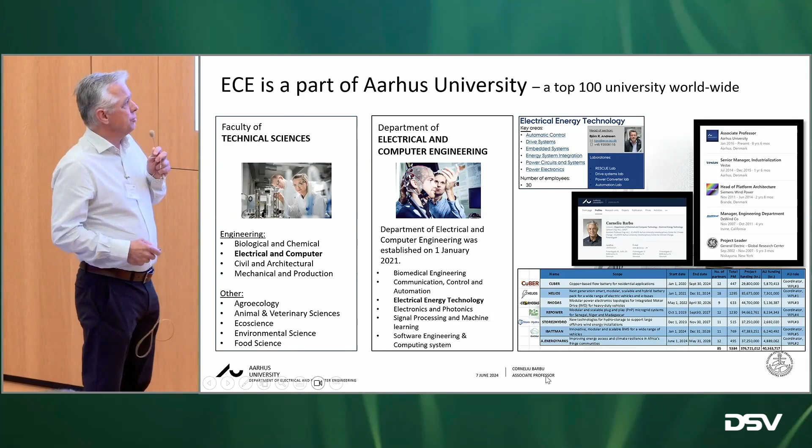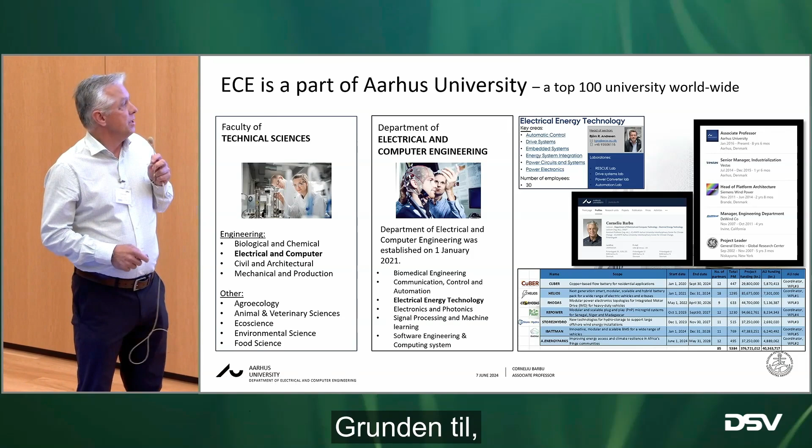But just as a short introduction, I'm from Aarhus University. We're in the technical science faculty in the electrical and computer engineering department. Specifically, I'm in this section called electrical energy technology. And I also put here a number of projects in which we are involved now. There has been quite a bit of European funding coming towards us recently. The reason why I put this here is that we are involved in a few projects which are about

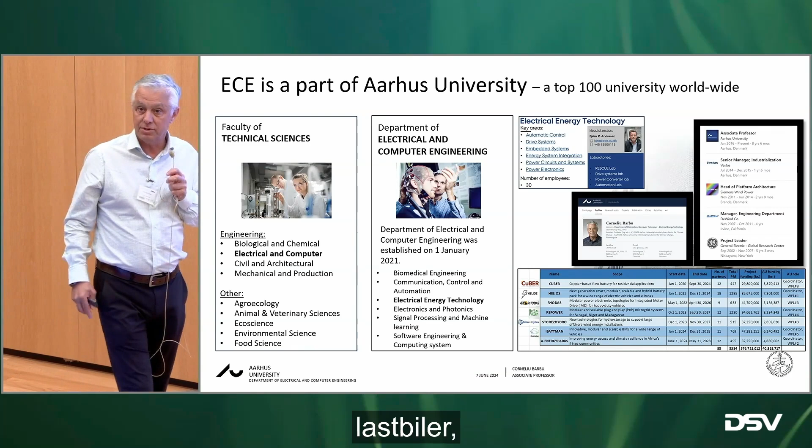electric transportation. In Helios, as an example, we're building a battery pack which is hybrid, a combination between high energy and high power type of cells. In RHODAS, we're looking into electric trucks, mostly on the power electronic side. And iBATTMAN is more on the BMS, cloud, edge computing, these kind of new buzzwords. Point of this being that we're also involved in developing some of these technologies, not only in using them. And there is quite a bit of collaboration at the European level in developing the new technologies.

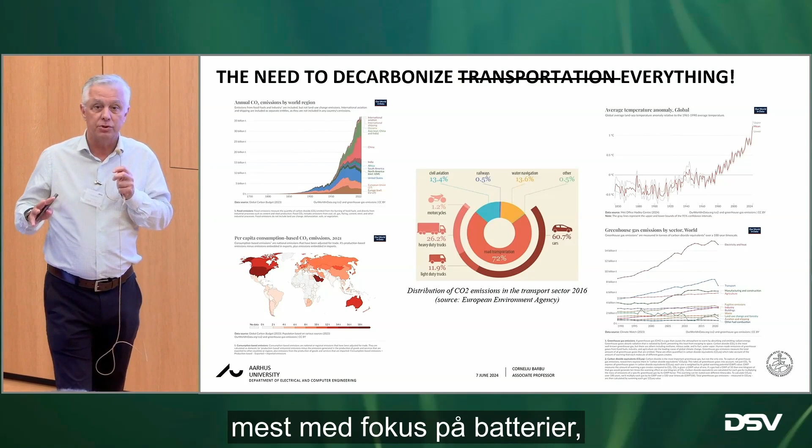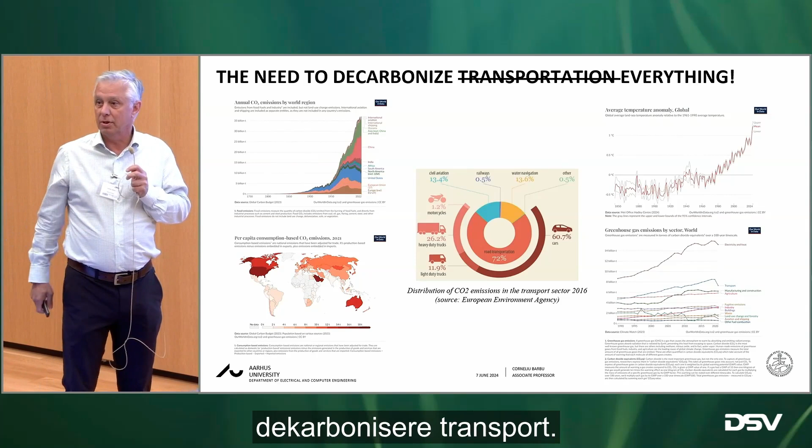So before I get into some of the specific technologies, mostly focused on batteries, charging, carbon footprint, things like that, I want to make a point about why we need to decarbonize transportation. And of course, I'm kind of preaching to the choir here. I'm sure everybody knows about that. But I would like to make a point in terms of the urgency of this imperative, right? So when I look at the carbon footprint around this time, which is about 35 billion

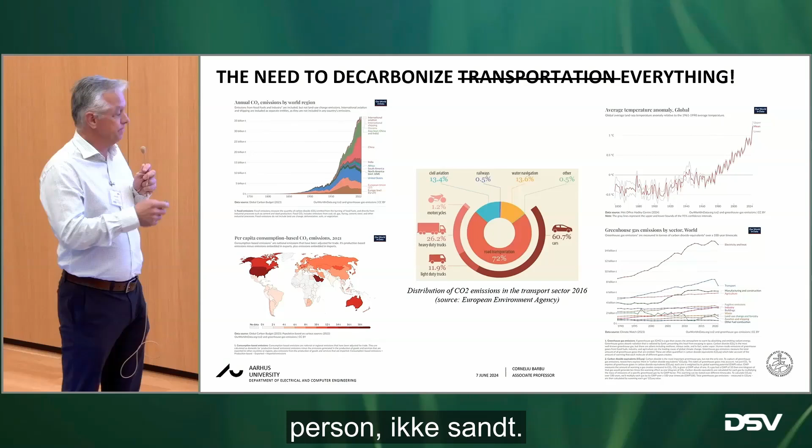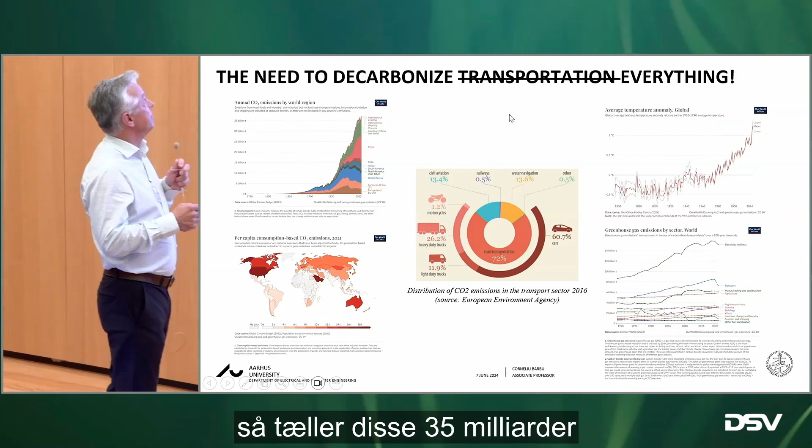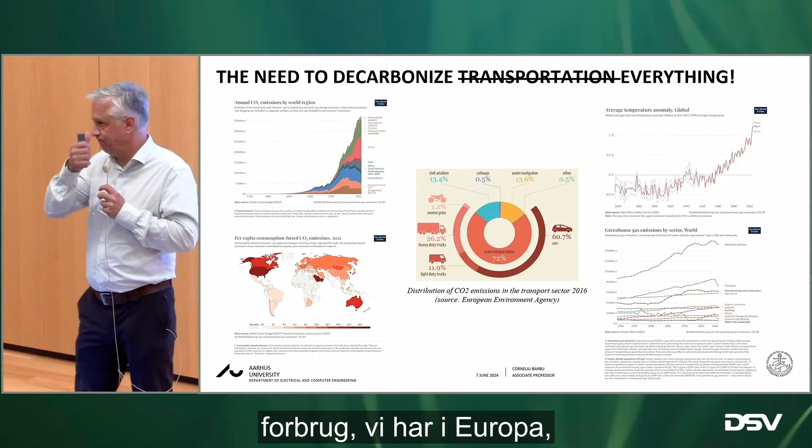tons, not including land use, and we're about 8 billion people, then on average we're about 5 tons per person, right? When I look at the carbon footprint on average in Europe, which is roughly about 10 tons, then essentially these 35 billion tons account for about 3.5 billion people at the consumption that we have in Europe now. Of course, not everybody consumes at the same level, and not to mention that these guys are way off the map. But on average, right?

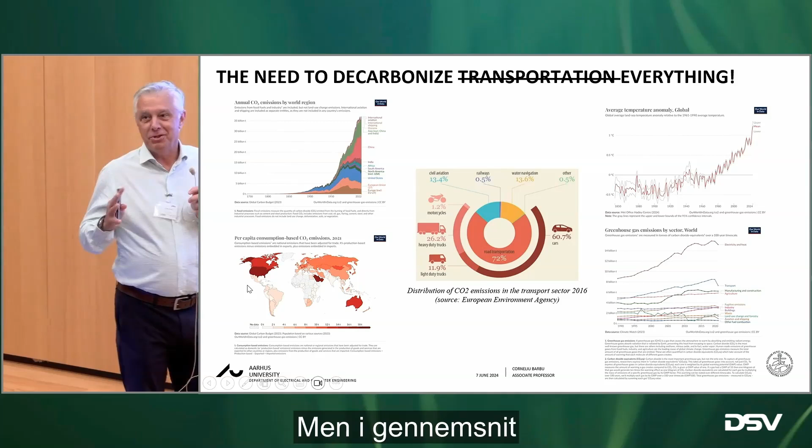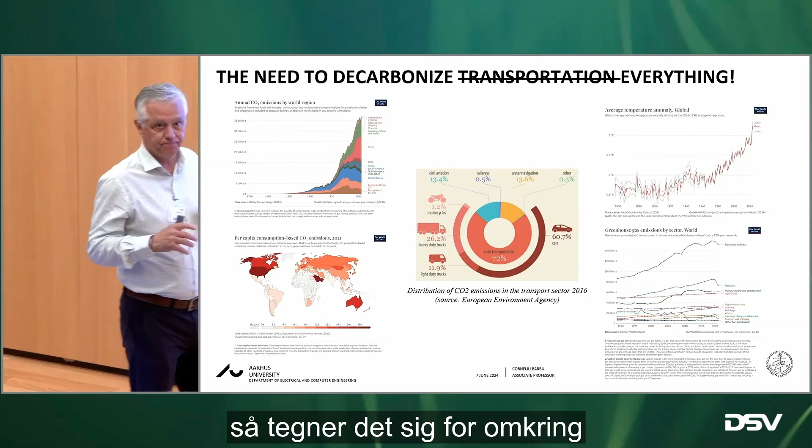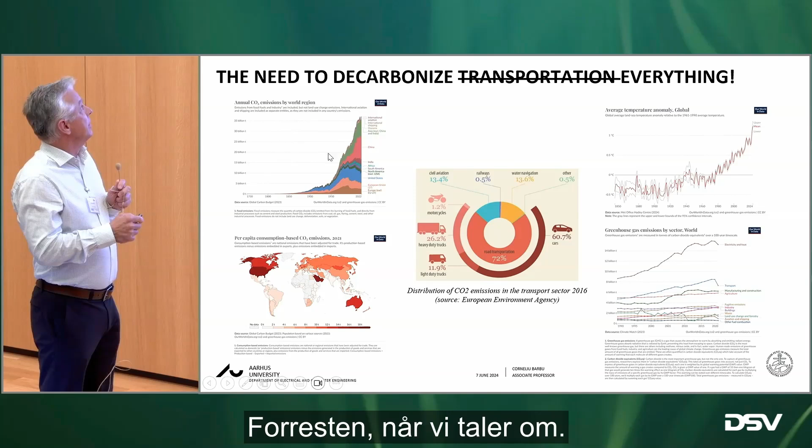You would say that at 10 tons per person, 35 billion tons overall carbon footprint per year accounts for about 3.5 billion people's consumption at the European level. By the way, when we talk about 35 billion tons, that is the annual production. So that comes on top of last year and the year before.

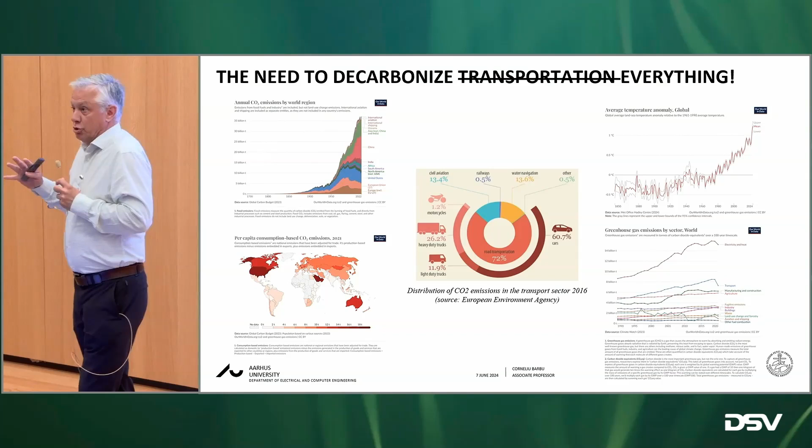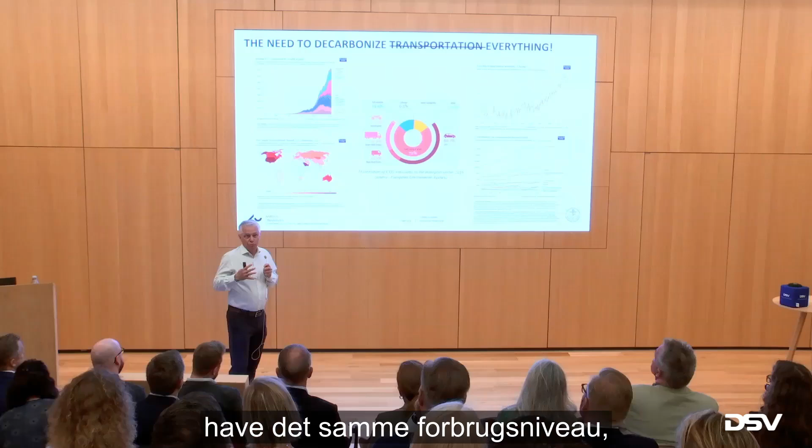Now we're about 8 billion people, and we grew at 1 billion every 10 years in the last 20 years. So roughly, let's say that we're going to be about 10 billion by 2050. When we look at the rate of growth between developing and developed countries, the developing countries are developing much faster. So we could probably assume that we're going to be 10 billion people, and a large percentage of them are going to have the same consumption level as we had, let's say, 25 years ago.

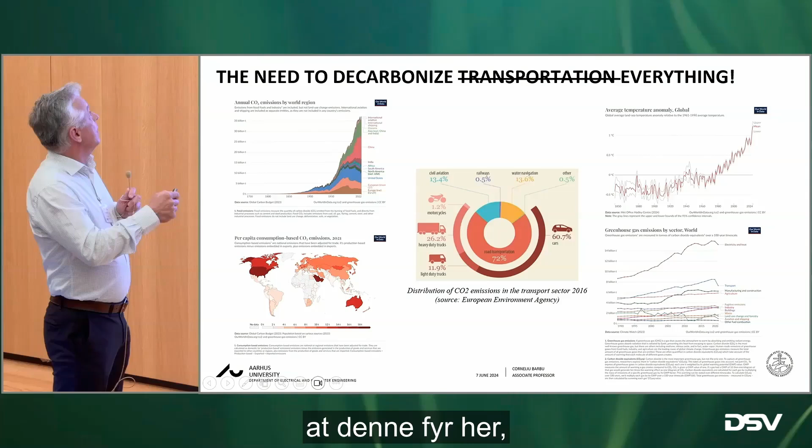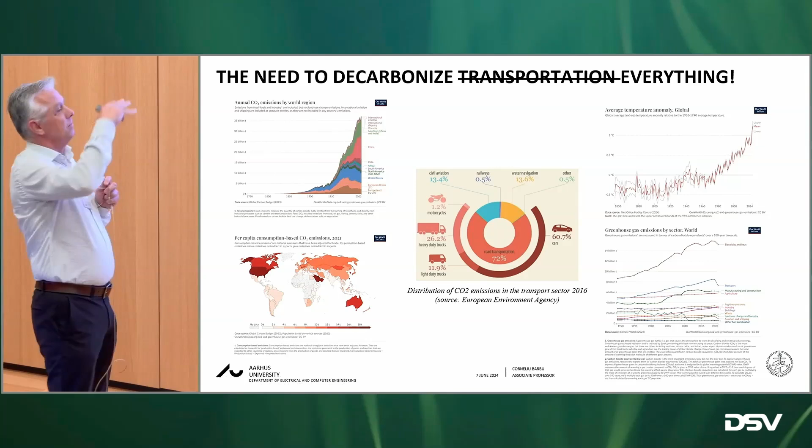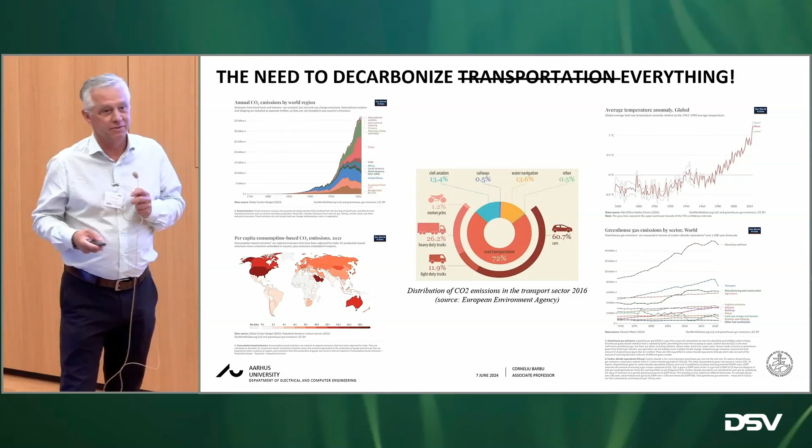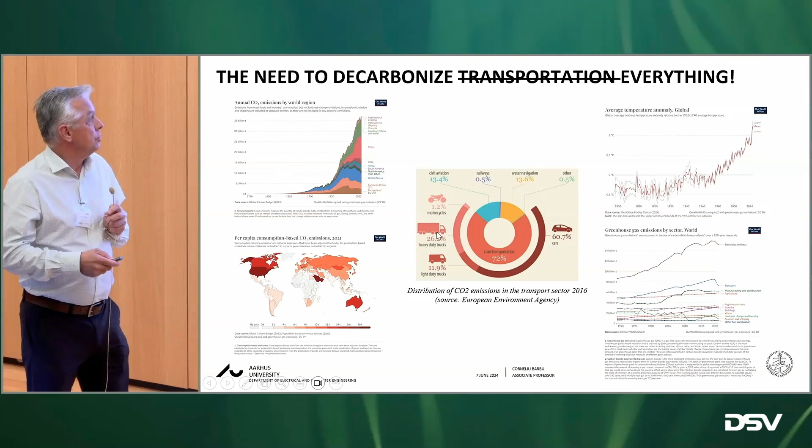Point of this being that this guy here, probably in 2050, is going to be closer to the ceiling, right? Which also means that this guy here is also going to be, so we are kind of running out of time. And of course, we have to talk about cost and things like that, but fundamentally, we have a big problem, and we're here because of this. So as I said in the title there, we just have to decarbonize everything, including transportation as well, right?

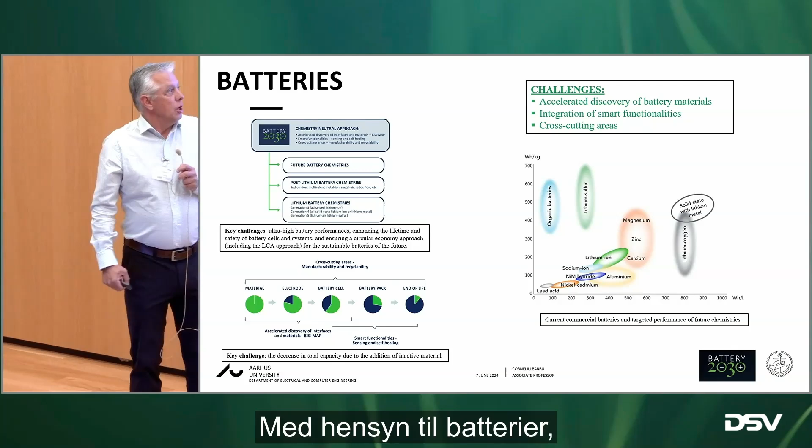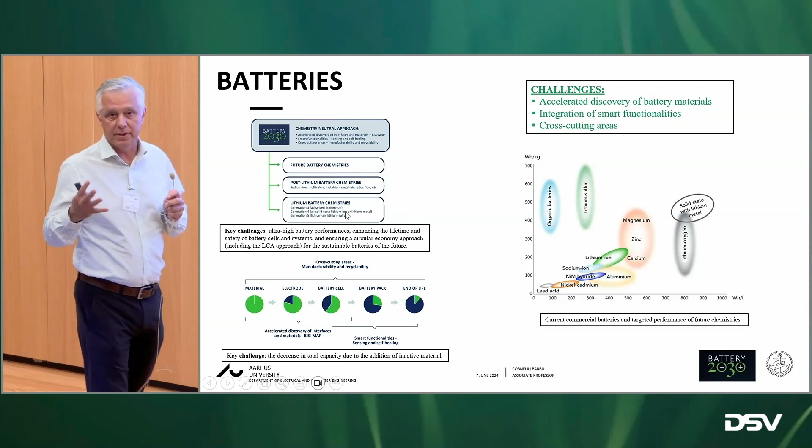So what are some of the challenges? I'm going to talk about batteries, charging technology, environmental footprint, maybe some others, right? In terms of batteries, chemistry is basically an evolving field. We have what we call Gen 3 battery technology at this point, lithium batteries, but these things are evolving, right? So we're talking about Gen 4, solid state, these kind of things. We're also talking about Gen 5 technologies.

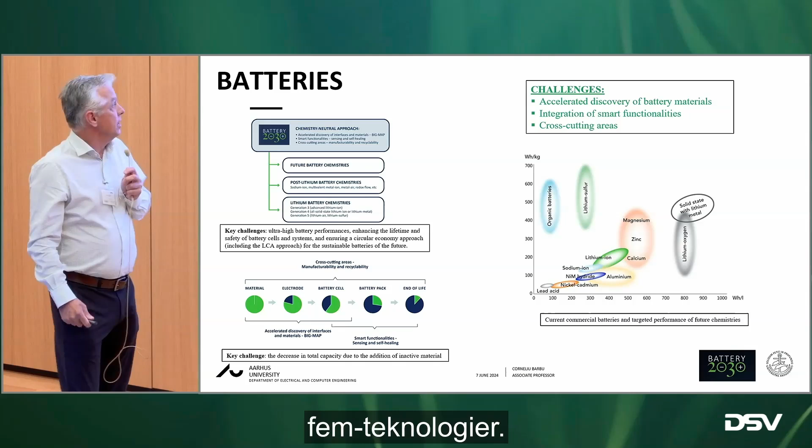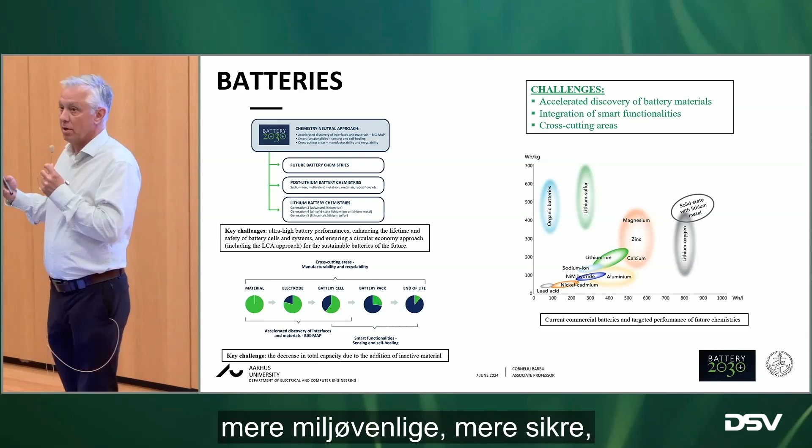So this is evolving, and of course, the technology is getting better. Essentially, we're looking into more performant technologies, more environmentally friendly, more safe, lasting longer, those kind of things. So there is a good and bad story about this, right? The fact that the technology is getting better is a good thing.

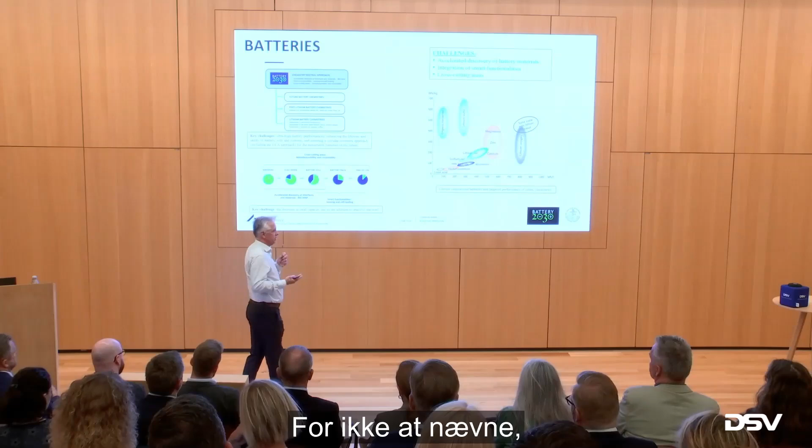But then on the other hand, let's say from a recycling standpoint, what we're going to be recycling is the old technology, which we can't do much about anyway. So until things are settling down, we're not going to be able to make much progress, right, in terms of recycling and those kind of things. Not to mention that new technology always takes some time to mature. But nevertheless, things are getting better, let's say in terms of energy density, range, charging time, those kind of things.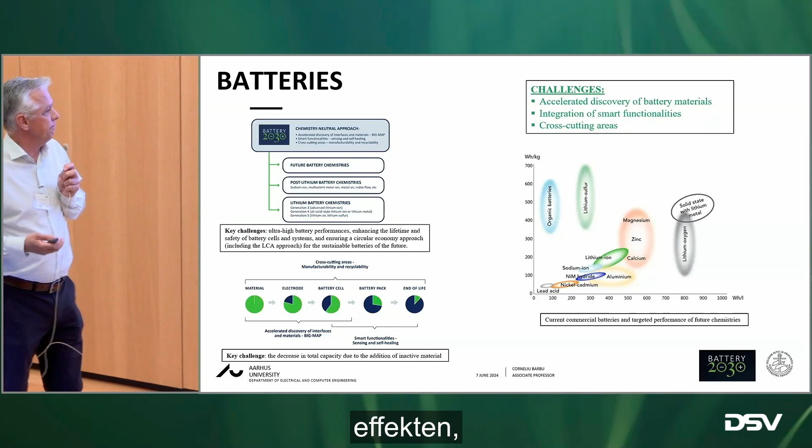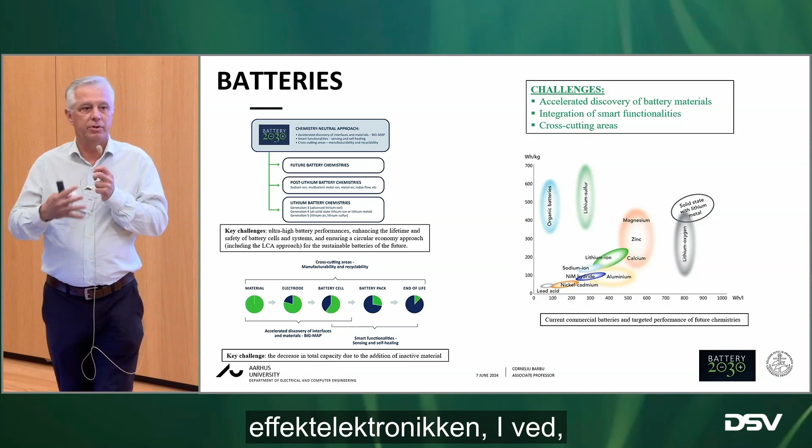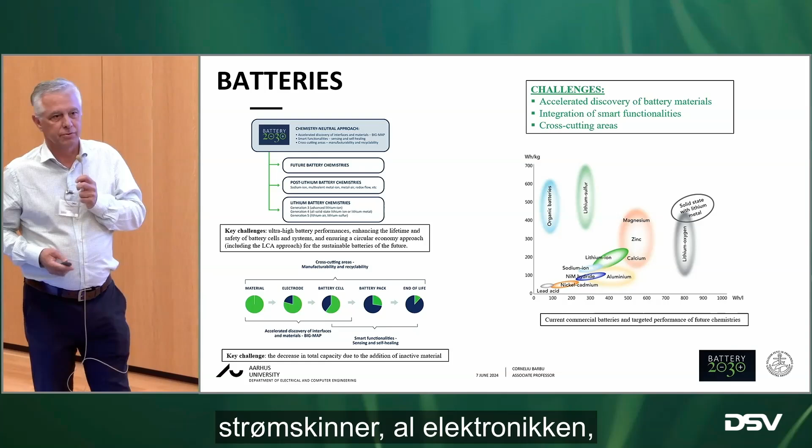On the other hand, when we look at the, let's say, effective materials, when we start from the battery cell and then we start adding things on top, such as the battery pack, battery management system, the power electronics, all these things, then essentially the stuff that we're really interested in the battery is becoming smaller and smaller. So we have to make progress on all the other things related to the battery pack, right? Casing, bus bars, all the electronics, those kind of things. So it's not only about the battery technology in itself.

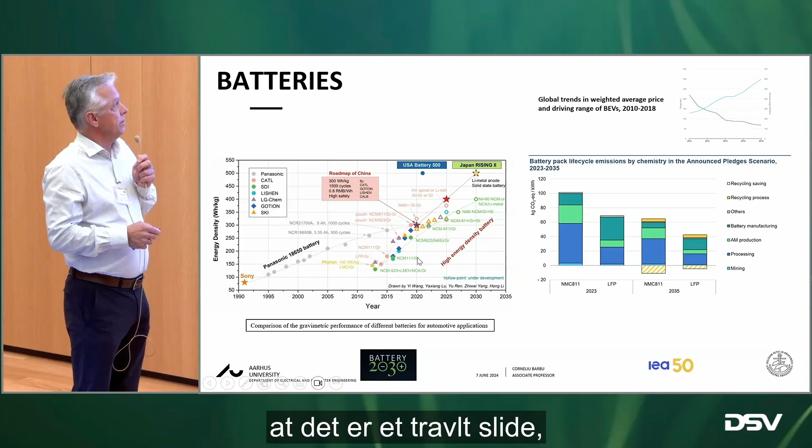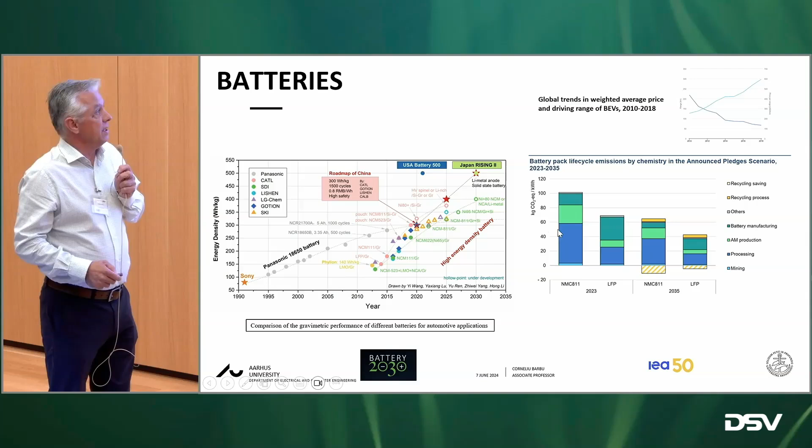Nevertheless, these things are evolving, and I know this is a busy slide, but essentially the point is to see that a lot of these technologies are getting better and better. There is a competition worldwide as to who's going to come up with the best technology. And these things are getting better as well from an emission standpoint, right? So that's why we're looking into better chemistries as well, because they have a better carbon footprint, better utilization, things like that.

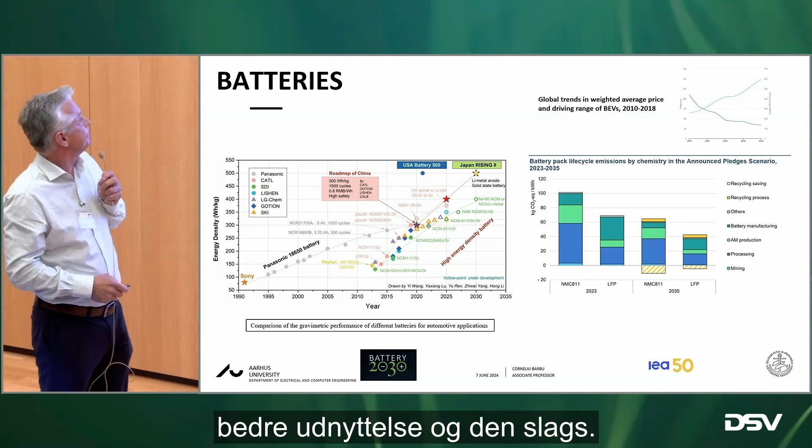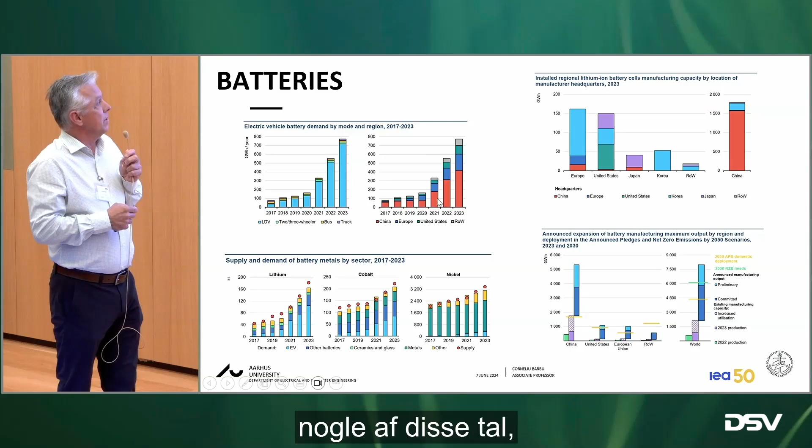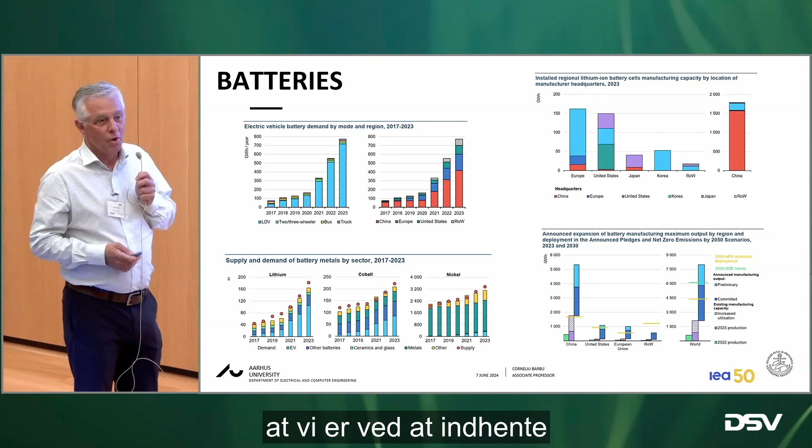So in terms of battery demand, I'm not sure how much you have been through some of these points before, but this is to say that the battery demand is increasing, of course, especially from light-duty vehicles, but the trucks are coming as well a little bit, and growing. What worries me a little bit is that we see this growth in China, of course, and when I look at the size of some of these numbers, let's say this one compared to this one, I mean, we're playing catch up. We're not leading the field. We're far from leading the field.

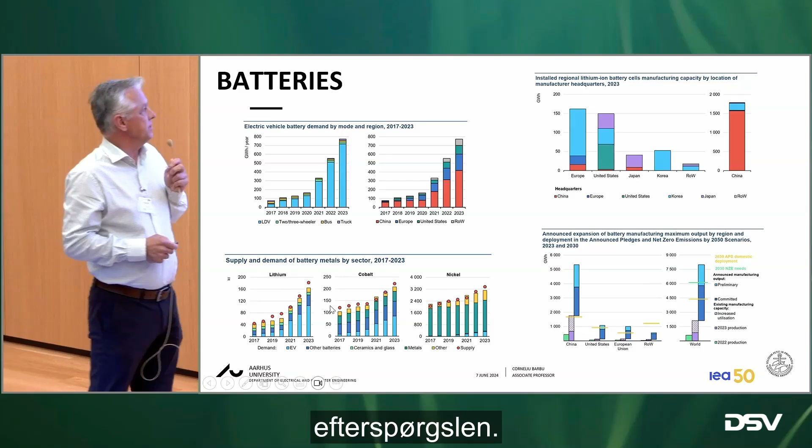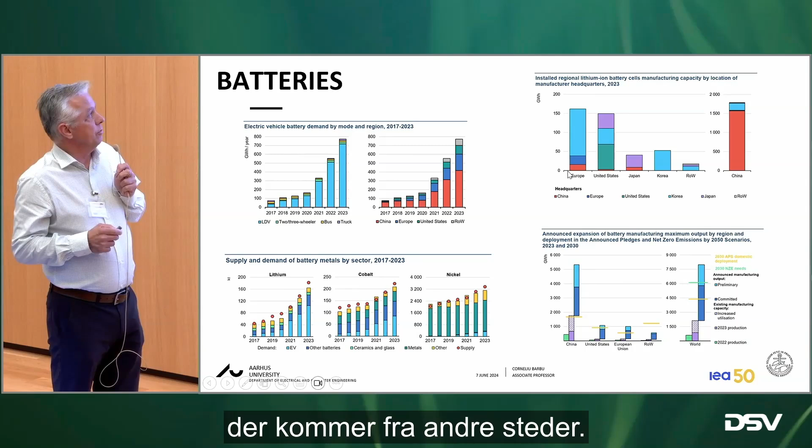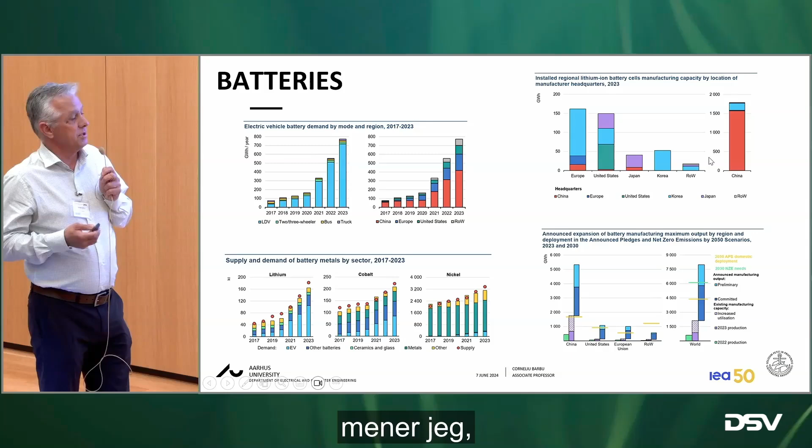Also in terms of material demand, right? It looks like the supply is kind of following the demand, so that keeps prices in check a little bit. And in terms of manufacturing, when I look at Europe, there are a lot of manufacturers coming from other places, so European manufacturers are actually not a whole lot. And when I look at the comparison between the manufacturing in Europe and China, it's just a completely different order of magnitude. The difference is massive.

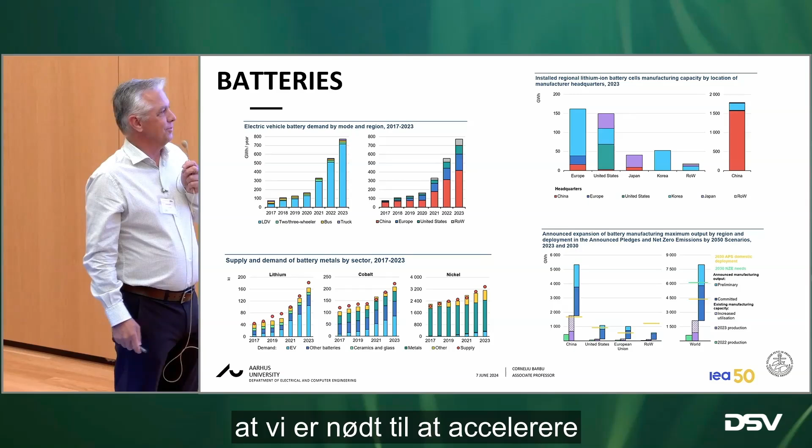And also looking at different scenarios, right, towards 2030, 2050, and things like that, China compared to EU, significantly different. So from that standpoint, I'm a little bit worried that we need to accelerate a lot to be able to catch up with the technology.

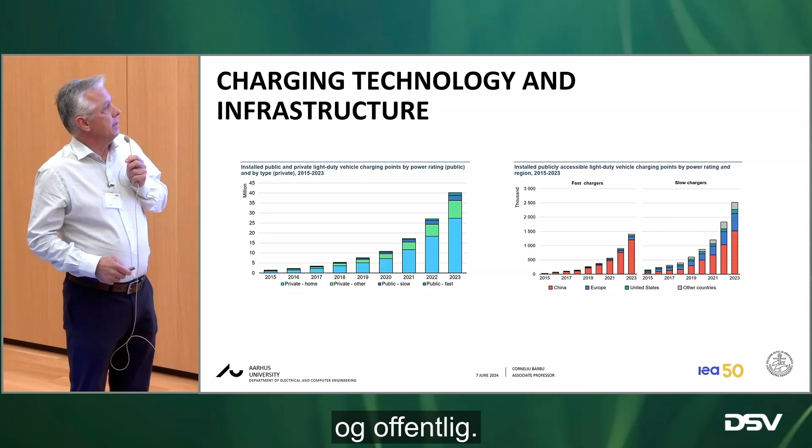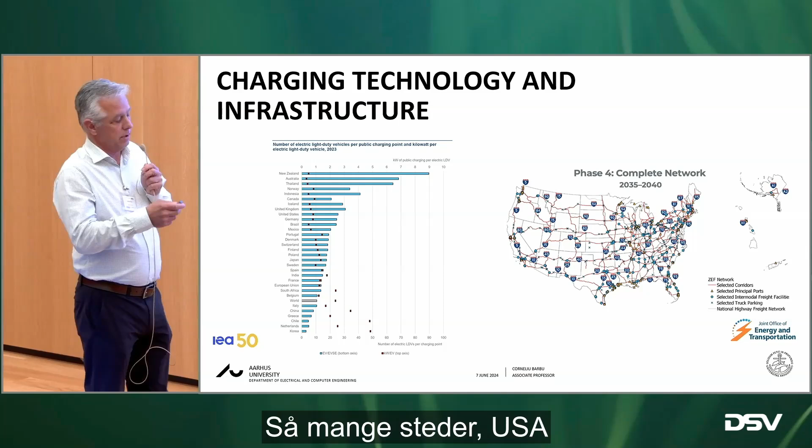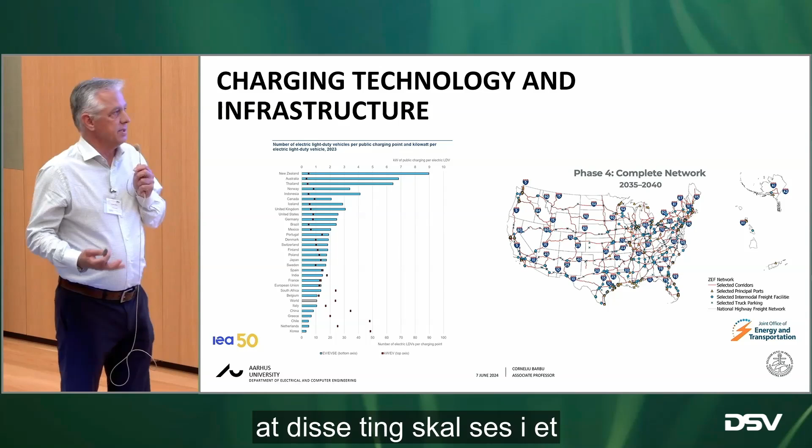In terms of charging infrastructure, that's growing, of course. I have here a combination between private and public, and a similar picture compared between China, EU, and North America. And we also see the charging distribution. So a lot of places, the US in this case, are looking into developing large charging infrastructures for trucks. So these things have to be taken into a much bigger perspective to be successful.

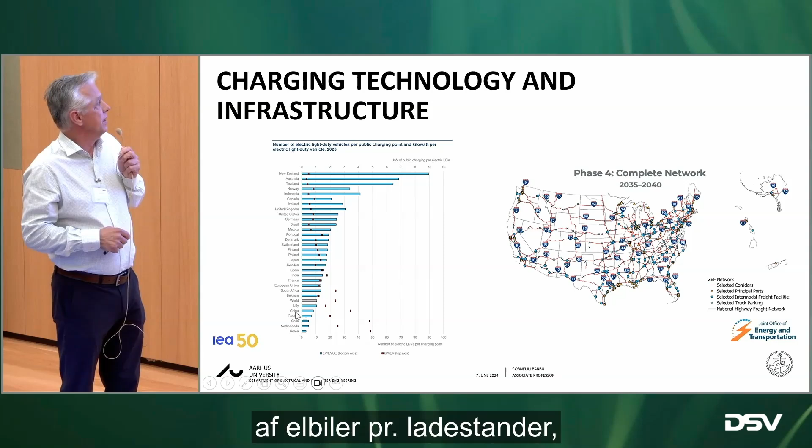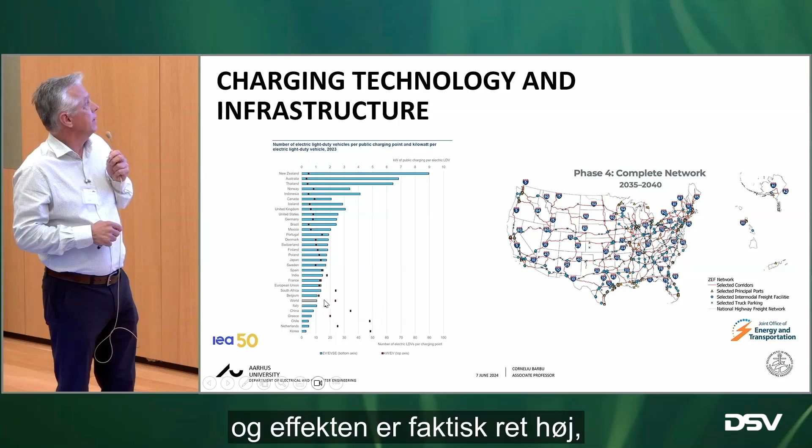And also in terms of, let's say, the power of the chargers and the number of electric vehicles per charging point, this bottom part here is better. In other words, in China, there is a very small number of electric vehicles per charging station, and the power is actually pretty high. And then this is the rest of the world. So from a charging infrastructure standpoint, we also have to make a lot of progress.

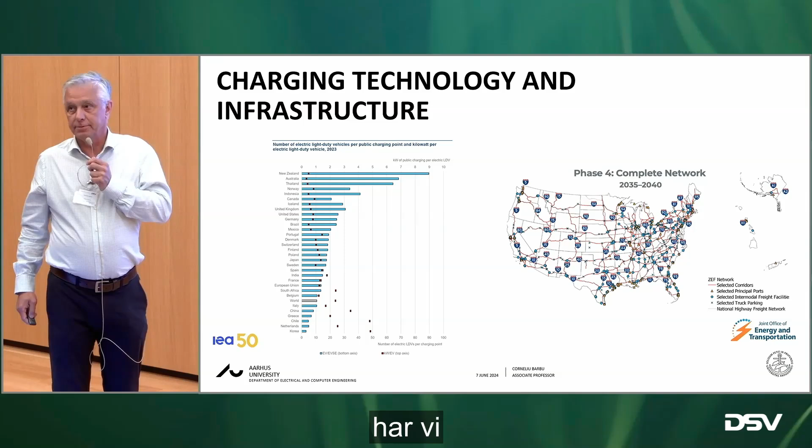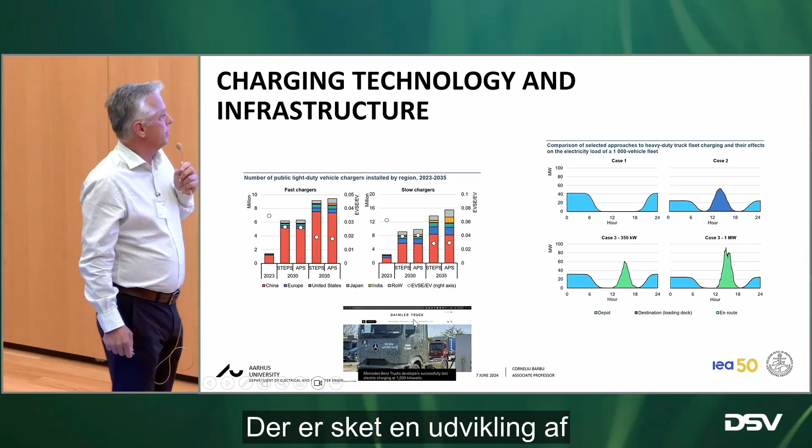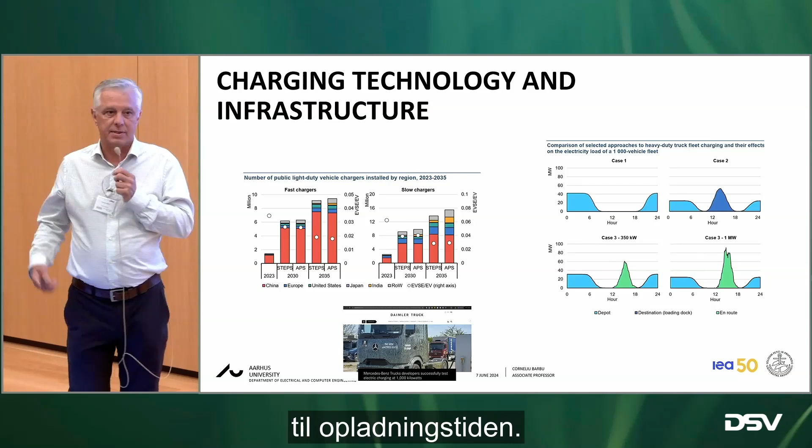And plans in the future, again, there are different scenarios, but things look a little bit better in China compared to the rest of the world. There are some developments for high-power electric truck chargers, and this is important in terms of charging time. Of course, there are some technical challenges related to this as well.

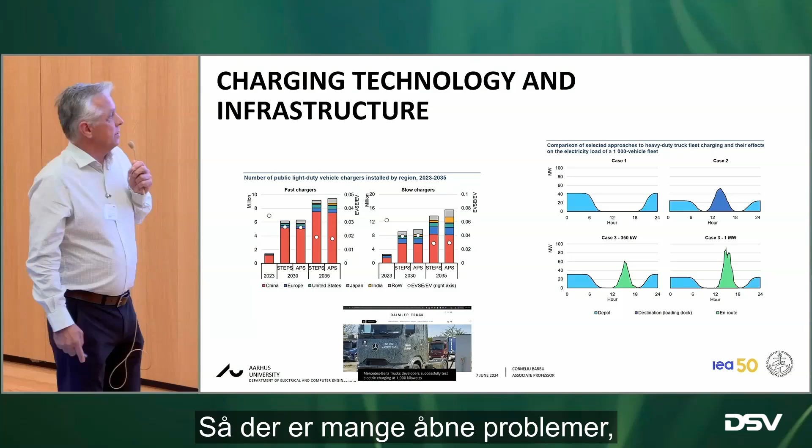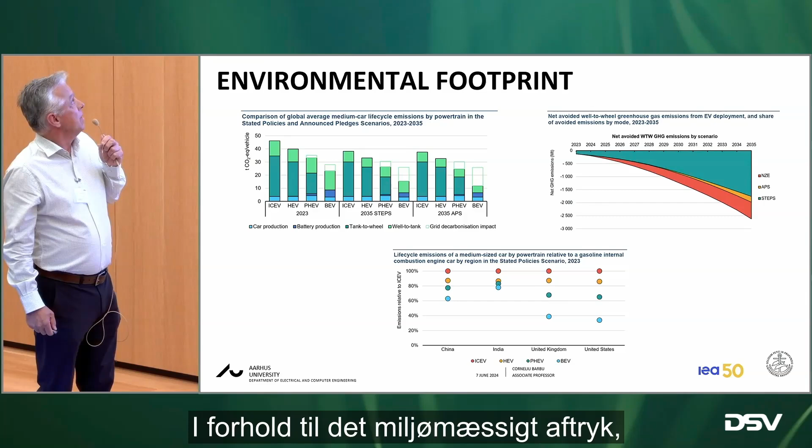And there is actually a big discussion about what will be a good charging profile. Should the trucks be charged during the night? Should they be charged during the day as well? Maybe some of the destinations should be closer. Maybe the charging time during the day should be faster. That would enable the integration of renewable energy a little bit better, those kind of things. So a lot of open problems, which from an engineering standpoint we like, but we need to get focused on addressing them.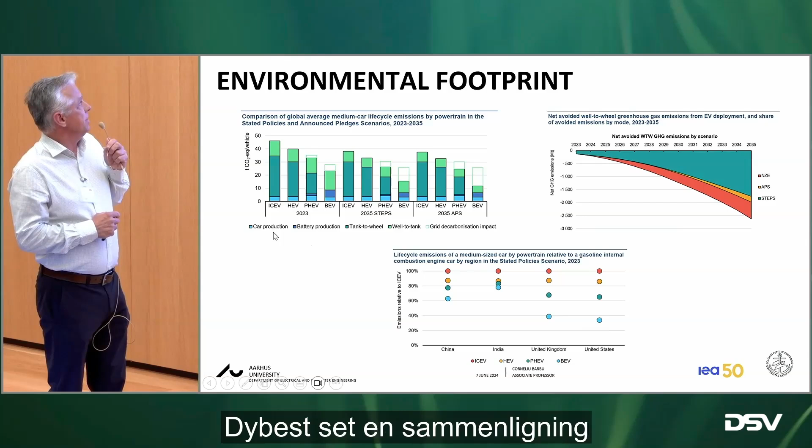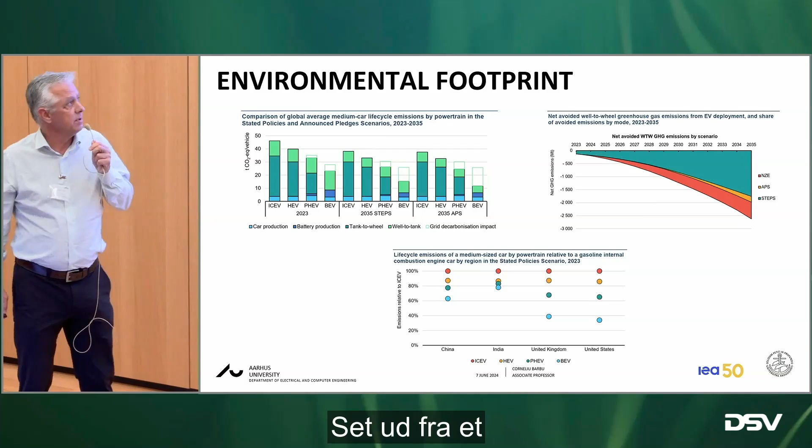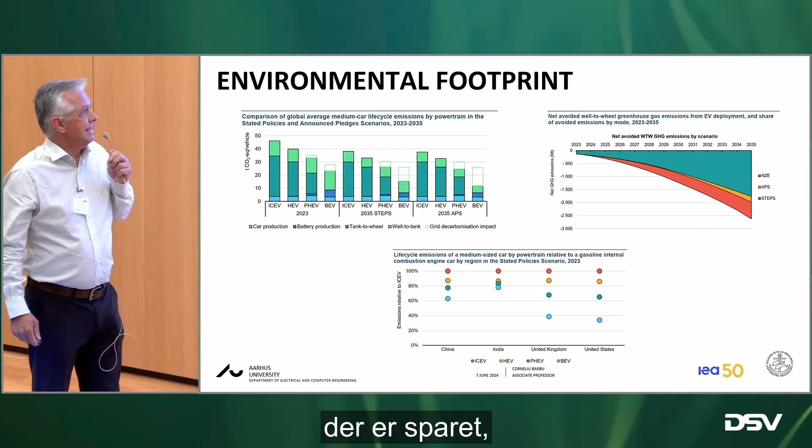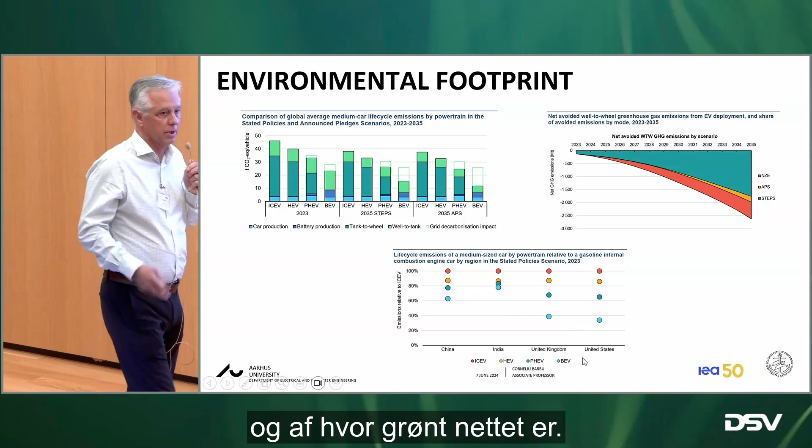In terms of environmental footprint, just to clarify this topic, and I think you have seen some of these points before, basically a comparison between internal combustion engine, hybrid, plug-in hybrid, and battery electric vehicle. Of course, the battery electric vehicle is better from an environmental standpoint. And because of this difference, the cumulative difference in terms of carbon footprint saved is significant over time. So that's important, but it's also important to say that this difference depends on where you are, on how green the grid is. If you burn coal to charge your car, you haven't made a whole lot of progress.

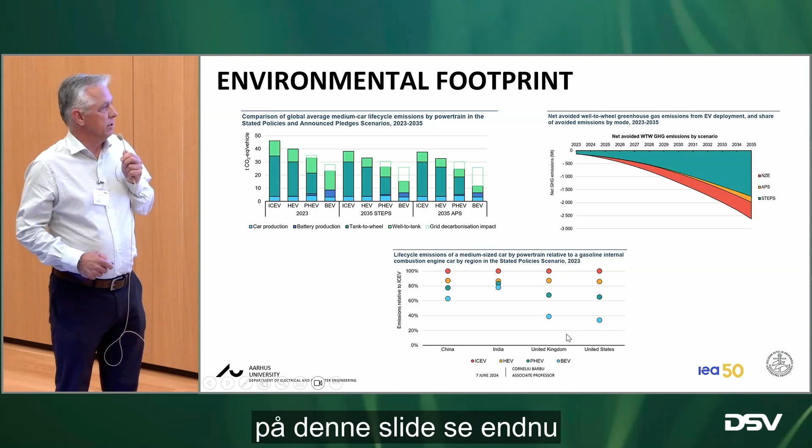And probably Denmark on this slide would look even better, considering the amount of wind energy on the grid. But this is also something to mention, that it's not only about the battery, it's not only about the pack, it's not only about the car. It's a significant shift.

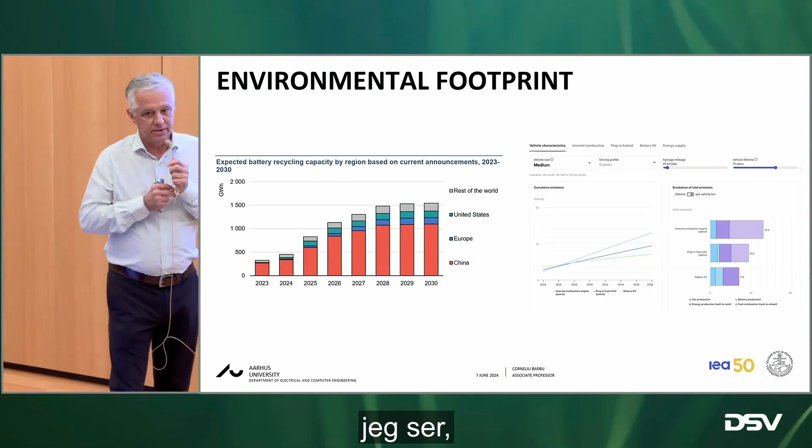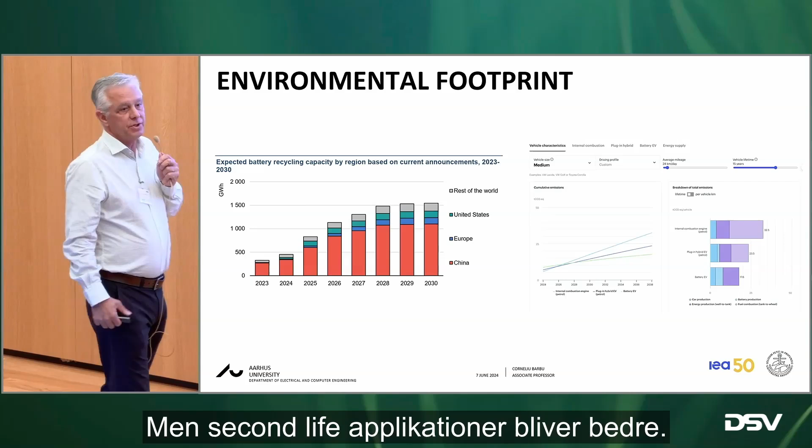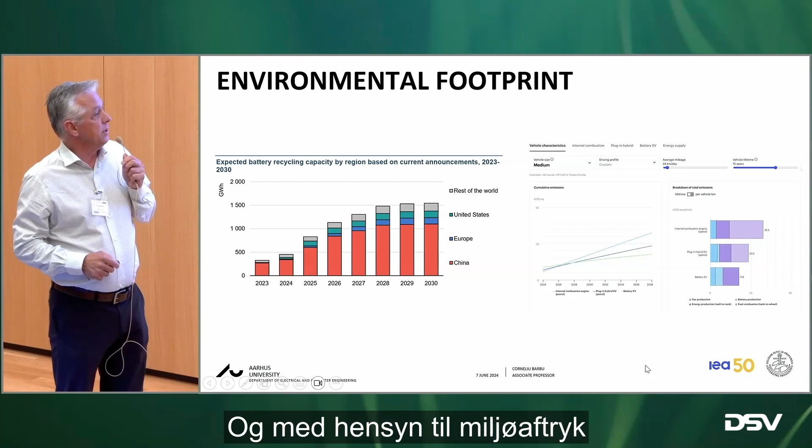In terms of recycling, again, this is getting better, but what I see is a challenge that the chemistries are changing, and so we're recycling old technology which is not very useful for the new technology. But second life applications are getting better, so the batteries are being used more and more to complete depletion, which is a good thing.

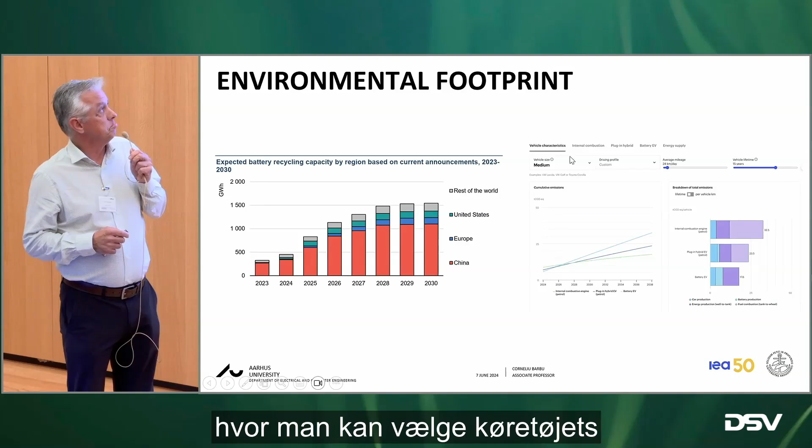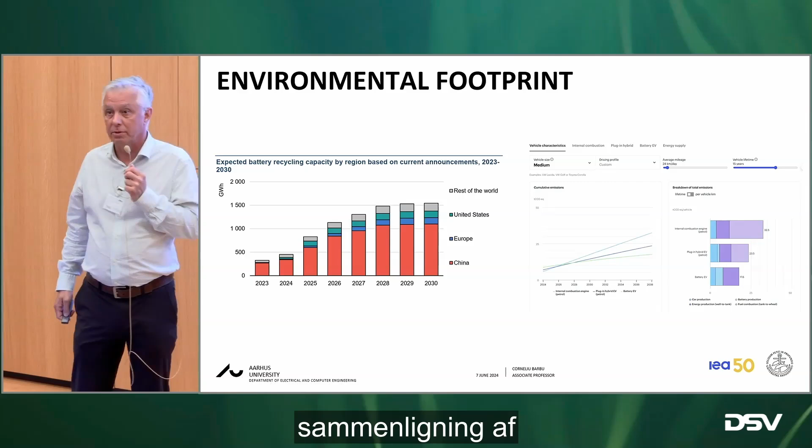And also in terms of environmental footprint, I saw that the International Energy Agency actually put out this nice little tool where you can compare the carbon footprint of your own car with a conventional car. You can select vehicle characteristics, different driving profiles, how much you're driving, things like that, and then they give you a comparison of carbon footprint for your electric car compared to an internal combustion engine.

So that was a little bit on the battery technology, on the chargers, on the environmental footprint. There are numerous other challenges as well. Of course, the drivetrain, the motors are changing. If you look at the battery pack, well, it's the whole electric drivetrain that has to be changed as well. So the battery pack, in some sense, is more of a gas tank, if you want, a pretty expensive one. So everything else on the drivetrain has to change as well, and reduce cost, reduce size, those kind of things. Research is very important as well, and we can also see that it is a little bit led by China at this time.

Trained labor force, there has been a bit of a mention before on drivers. If we're shifting the whole energy system towards a more decarbonized energy system, we're going to need a lot of labor force. It takes a little bit to train, go through a bachelor program, masters, and so on. So the more engineers we have, the better. And there is a shortage of labor force today.

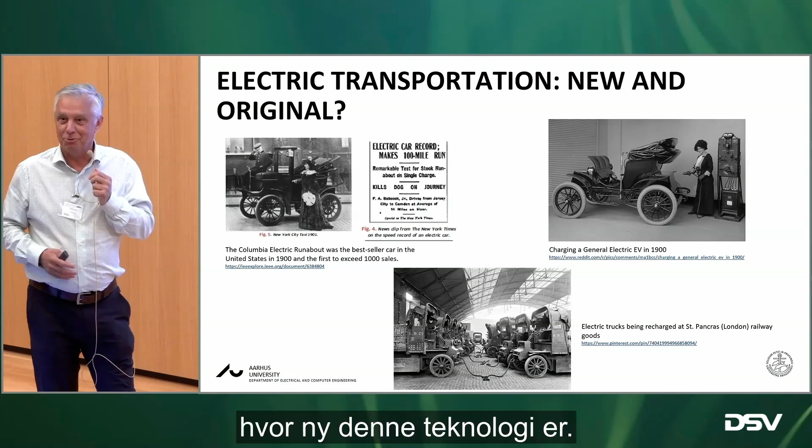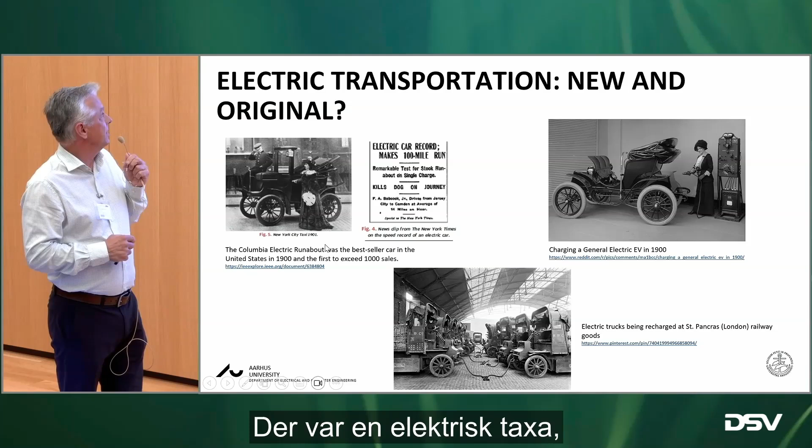And I've been told to mention a little bit about myth busting, how new this technology is. And I found these examples back in the 1900s. There was an electric taxi, actually, built by this company called Columbia Runabout. The car was called Stock Runabout. Ran 100 miles on a single charge. That's about 160 kilometers, so it's not too bad for the 1900s. Kills dog on journey, probably the first mention of a dog ever being killed by an electric car.

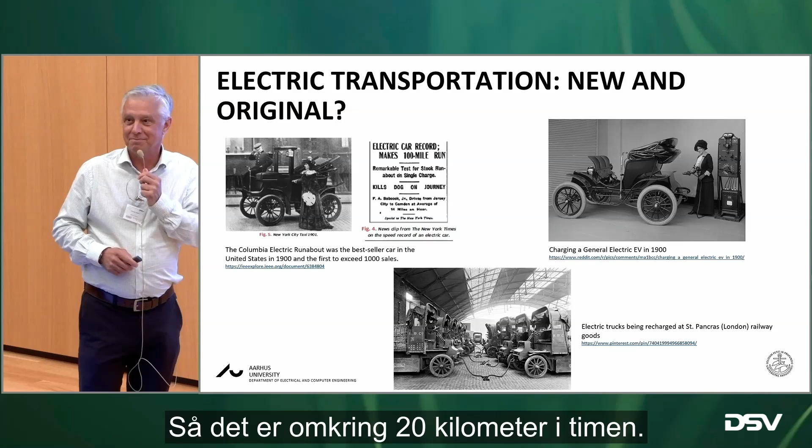14 miles per hour, so that's about 20 kilometers. Okay, probably some of us can bike faster, but you can see charging stations here, charging stations for trucks. So the technology was actually pretty popular about 100 or so years ago. Of course, it didn't survive because gasoline engines came about, so there was again a decision based on cost. We know the history, right?